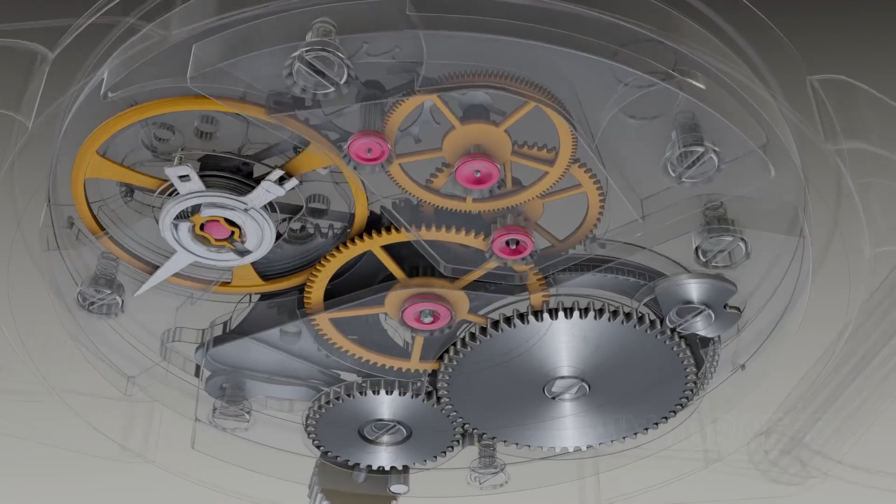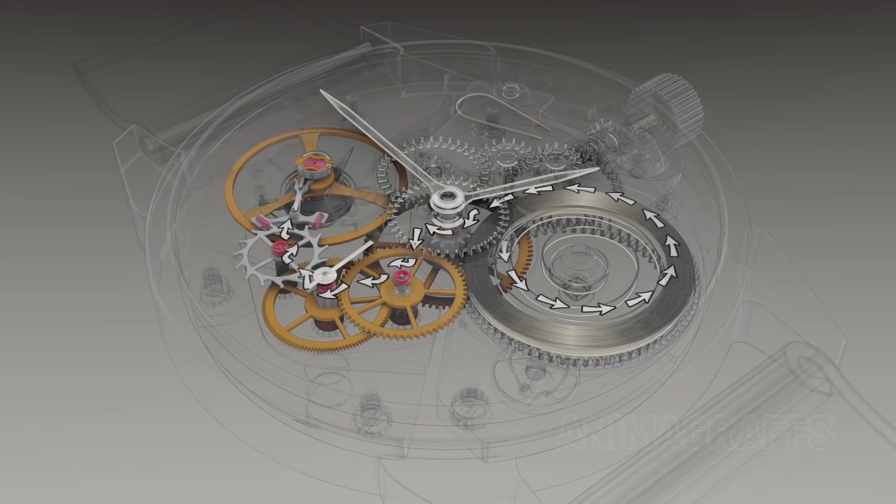In this first video of our On the Bench series, I'll be covering watch part names and functions. If you're new to watchmaking or just want to know what's inside of a mechanical watch, then please stay tuned. The first system we'll cover is the power transmission. Power is transmitted from the mainspring through the center wheel and continues through the train of wheels to the escapement. The mainspring provides all of the power to run your watch.

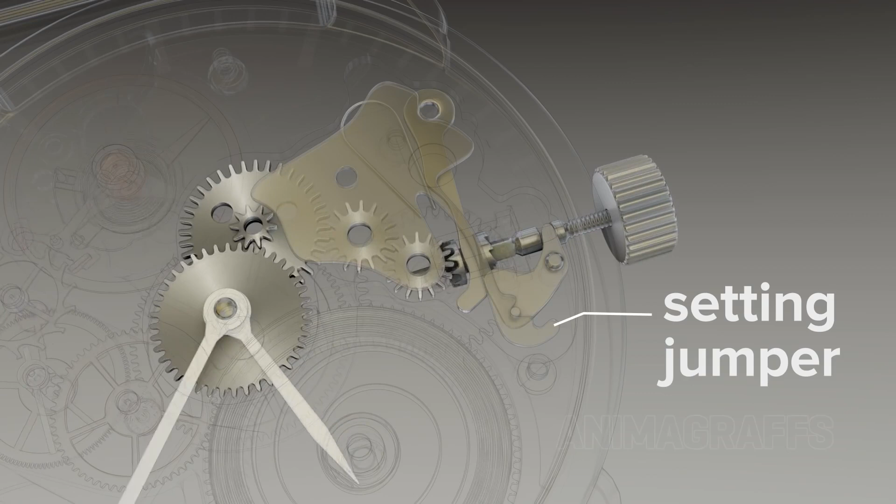The keyless works enables you to wind or set the watch. It contains the set lever spring, the yoke, the sliding pinion, the winding pinion, the stem, and the crown. When the crown is pushed back in, the sliding pinion moves back out and engages the winding pinion. This allows you to wind the watch.

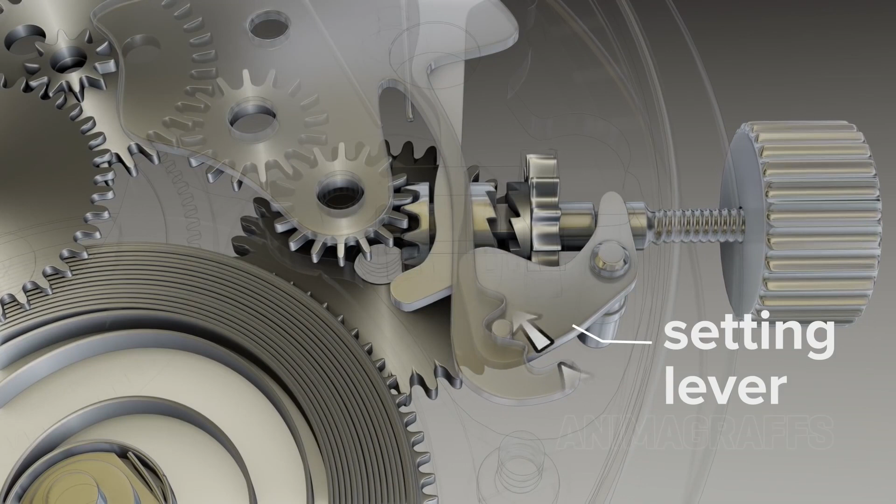In the video, you see the stem and crown being pulled out. That caused the sliding pinion to engage the intermediate wheels, which will allow you to set the time. When the stem is pulled out and pushed back in, it causes the setting lever to move from one position on the setting lever spring to the other. This either puts the watch in set or wind.

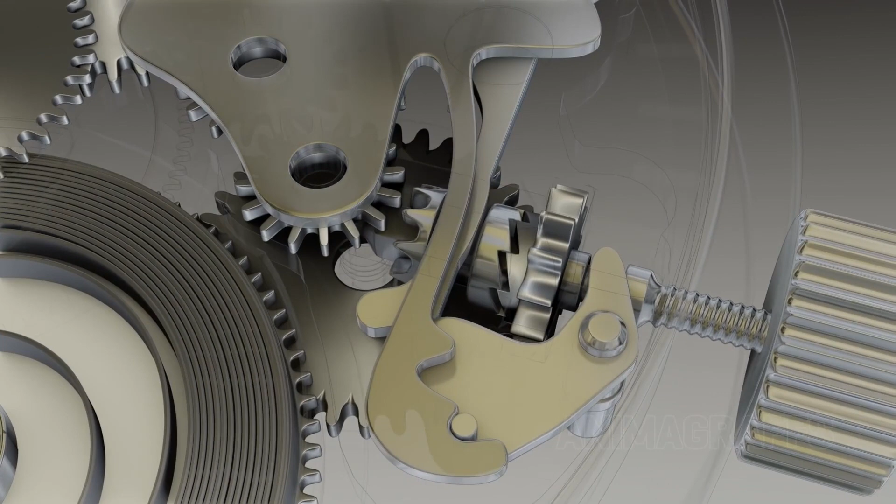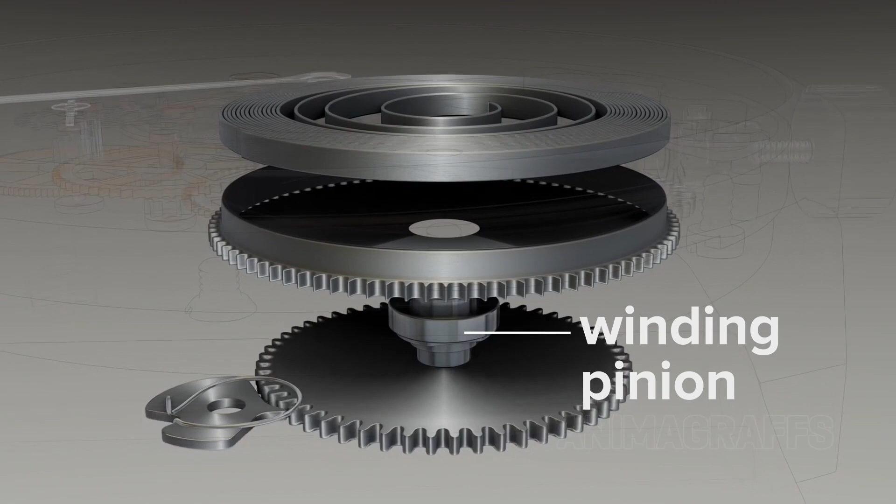The mainspring is housed in the mainspring barrel, along with the mainspring barrel arbor, the ratchet wheel, the click, and the click spring.

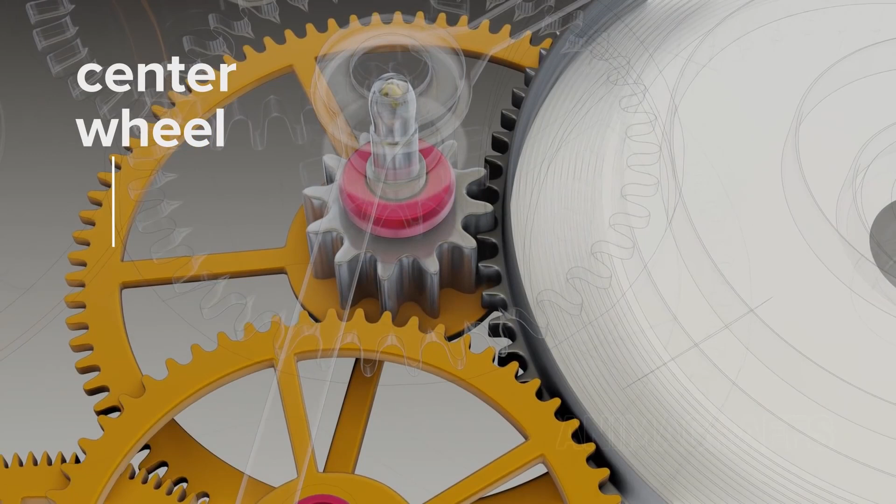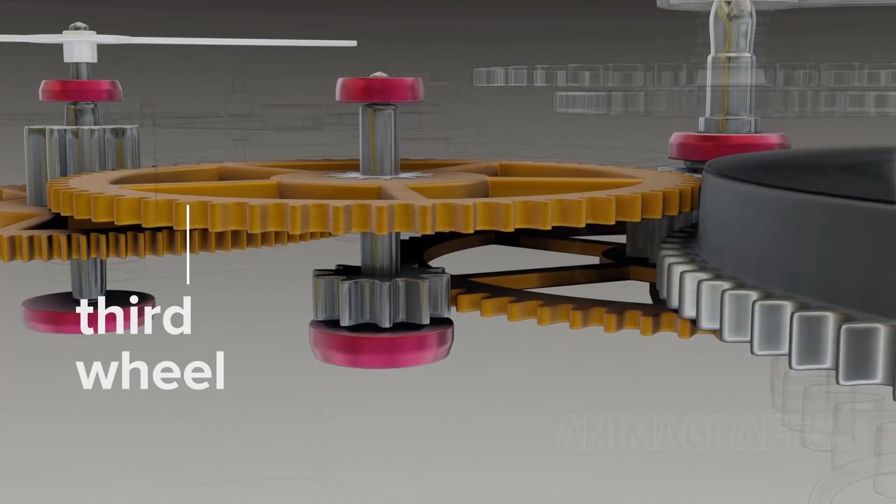Now we move over to the train of wheels. The mainspring barrel engages the center wheel. The center wheel also contains the cannon pinion, which holds the minute hand. Third wheel into the fourth wheel. The fourth wheel is the wheel that holds the second hand, which rotates once a minute.

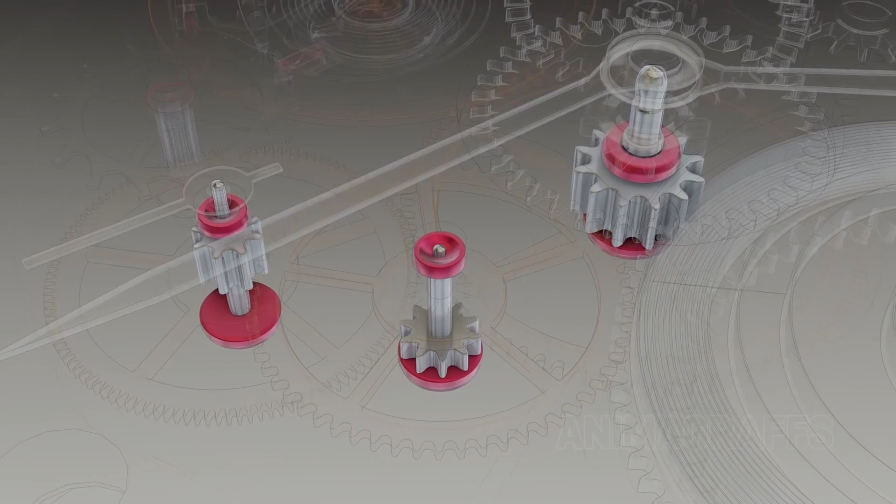The wheels are mounted onto axles. They're very, very thin. They ride in jewels. They act like bearings to reduce friction. Now we'll take a look at the motion works.

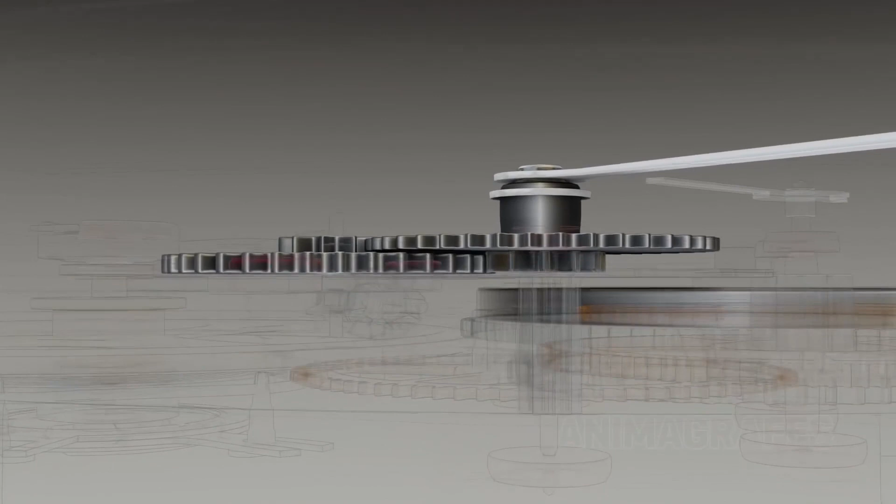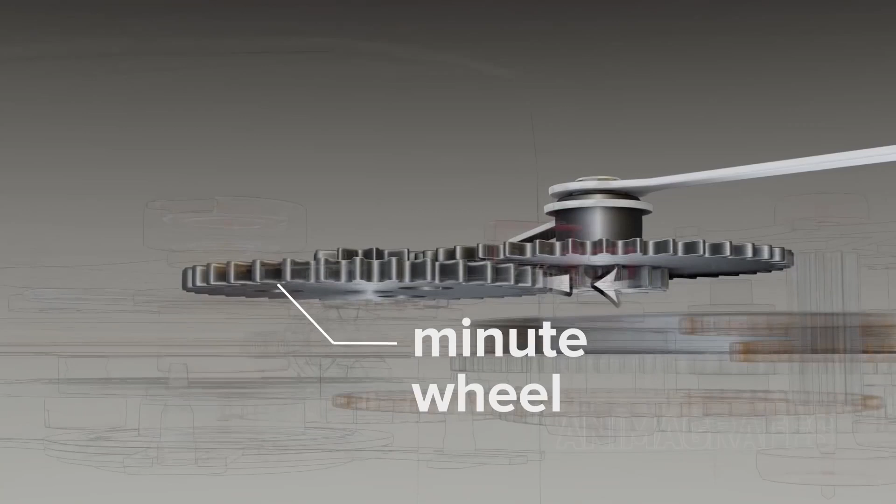Okay, back to the motion works. The motion works consists of the cannon pinion, the minute wheel, and the hour wheel. The hour hand, as the name implies, is mounted to the hour wheel. And the minute wheel reduces the rotation between the cannon pinion and the hour wheel.

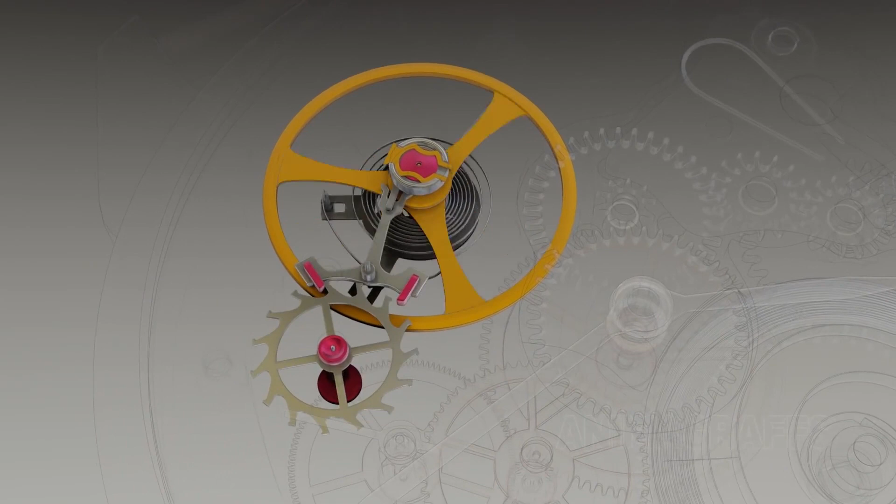Now we can take a look at the escapement and the balance wheel. It consists of the balance wheel, the hairspring, the pallet fork, and the escape wheel. This allows the power from the mainspring to escape at a controlled rate. The balance wheel is on an axle called a balance staff. The tips of the balance staffs ride in the same type of jewels that were seen earlier. A small amount of lubrication is applied to each one of the jewels.

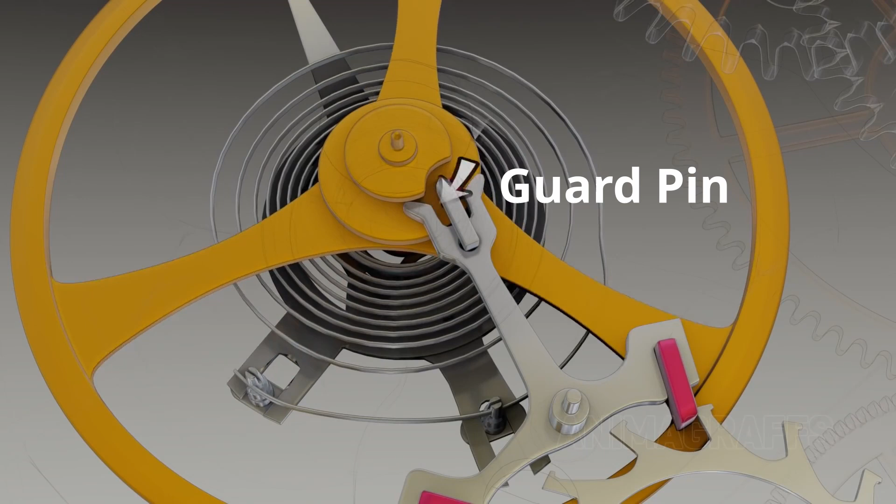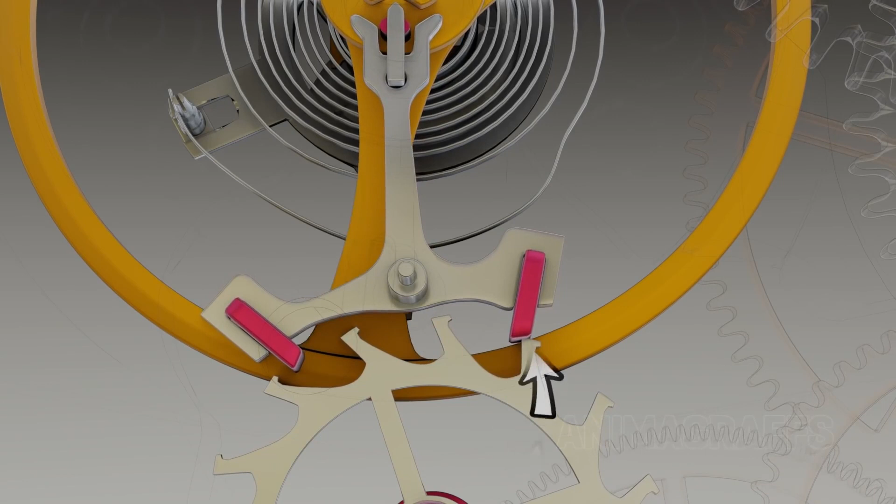If you watch closely, you'll see as each escape wheel tooth slides off of the jewel on the right hand side of the pallet fork, it imparts a little push to the pallets, which in turn pushes the roller jewel, which you can't really see yet, on the balance wheel. This causes the balance to oscillate back and forth. Here you can see the roller jewel, an oval-shaped red piece. If you notice, the top disc has a little crescent cutout right behind the roller jewel.

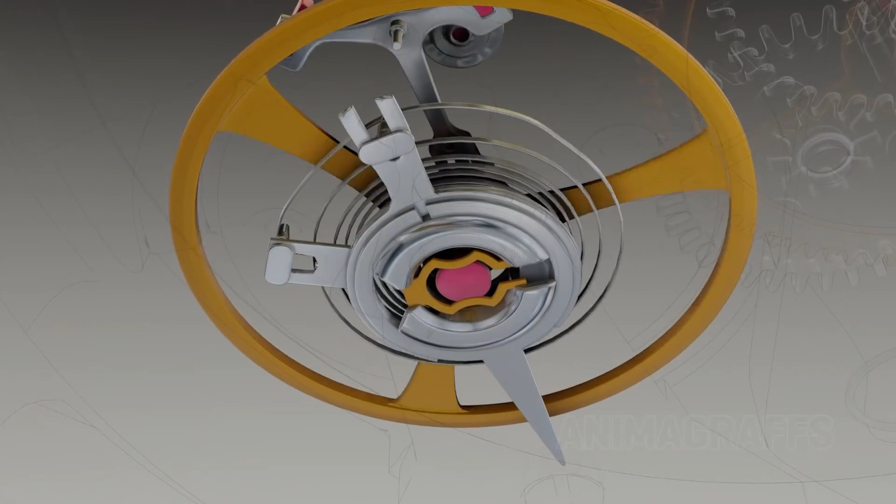In order to regulate or adjust the timing of the watch, the regulator stud is moved forward and backward along the length of the hairspring. As the balance oscillates back and forth, that guard pin slides through that crescent, and this prevents the watch from becoming "overbanked" if it should receive a jolt while the roller jewel is out of position. This is why it's called the guard pin. The model of watch that's being shown here operates at 21,600 beats per hour.

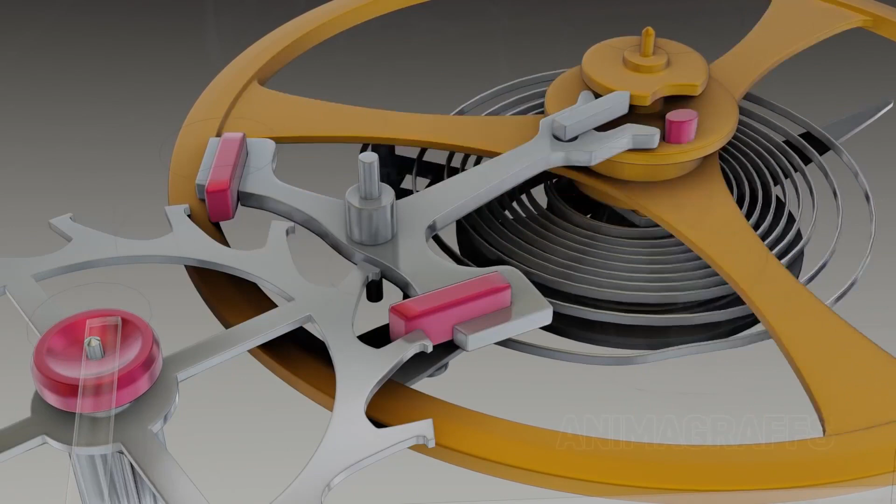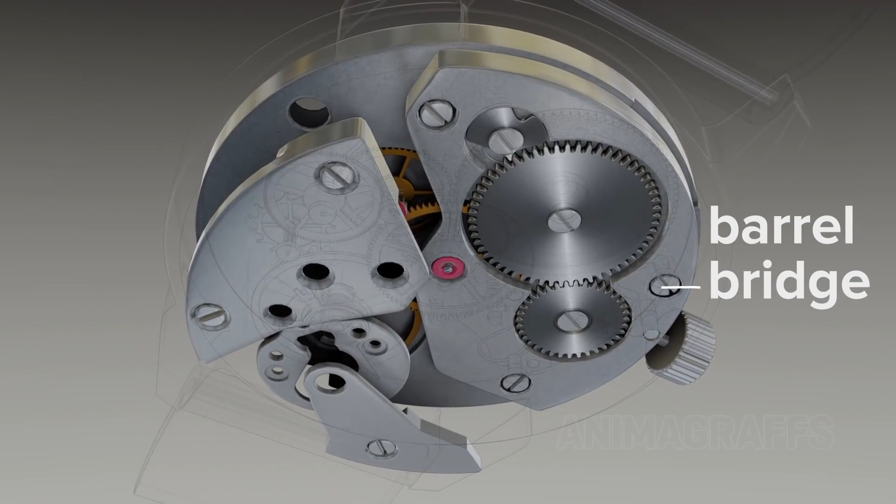The foundation of a watch, in which all other parts are housed, are usually called plates. In this shot you see the main plate, which is also called the dial plate. Next is the barrel bridge. The train wheel bridge covers the train of wheels. The pallet fork is secured by a pallet bridge. And lastly, the balance cock.

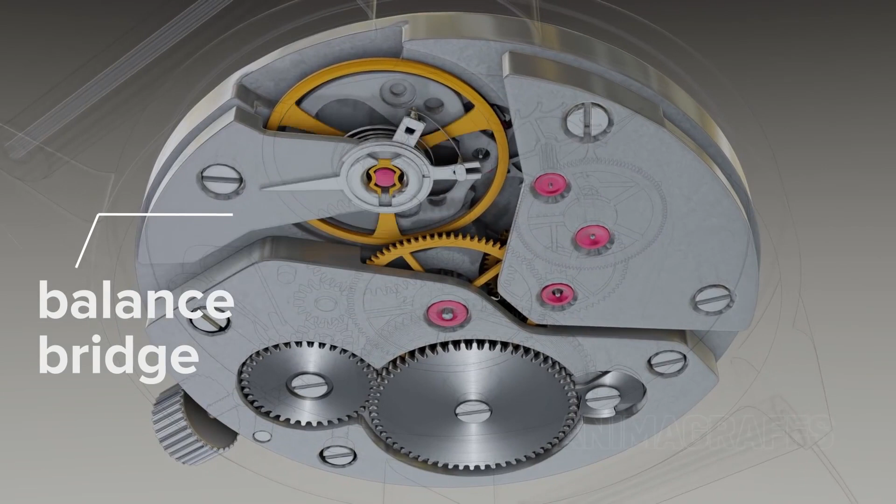So if you're new to watchmaking or thinking about getting into watchmaking, or you're just curious about how a mechanical watch works, we hope you've enjoyed this video, that it's been informative or at least been entertaining.